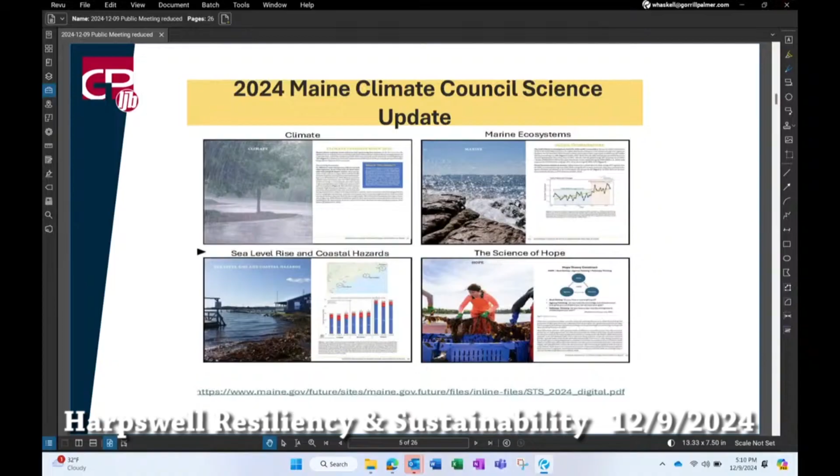A variety of different projects, from roadway projects to these resiliency projects more recently. We're also working on a couple of projects that are storm damage repairs from the last January storms. We're doing some work over at Little Islands Road, and also down at the end of Ocean Street, the trail to the giant stairs. There's some significant erosion there along the embankment that we're taking a look at. I think both of those projects have FEMA funding associated with them because of the damage and the disaster declaration from the January storms, but it all ties into these projects.

So we're working on this project for Bethel Point and Abner Point, and we also have another project for Lowell's Cove Road and Dingley Island. That will be coming next, with more meetings on that as well in the coming months.

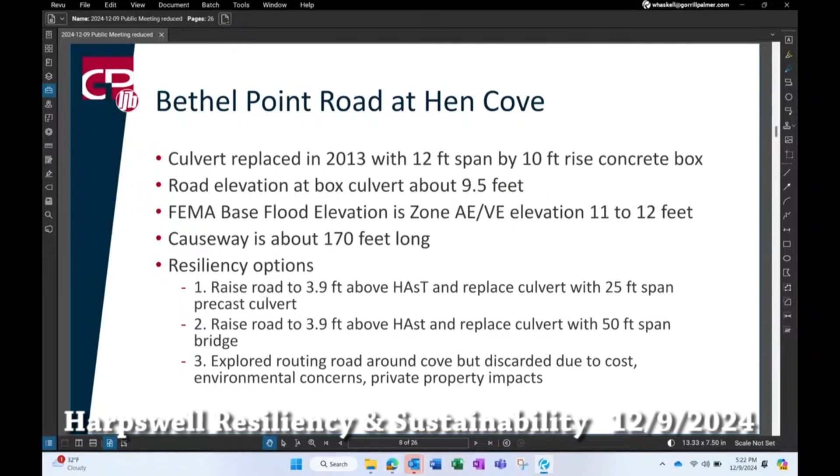So here's the current flood map. I just wanted to bring that up a little bit so you can see the road in here, but it essentially comes down and crosses over the cove here. Hen Cove Road comes off right here, Sage Road, which is a private road, is up here — just trying to orient you to everything. And Little Ponds Road is right here. So the ocean is down in this direction here.

So what we see on this map is this VE zone, elevation 12, which I mentioned, basically falls in between these white lines that I'm outlining with my cursor here. These maps are very interesting because on this side of the white line, it's elevation 11. So just a little bit of description of FEMA maps.

VE is a velocity zone, and it's where you'll see waves impacting the base flood elevation. As you move in closer and closer to shore, usually that elevation will drop down because you're getting more friction for the water as it comes in, and those waves aren't breaking as high. So what that shows is that over the bridge there, or over the culvert, the elevation of the base flood is elevation 12, which, as I said, the road is 9.5.

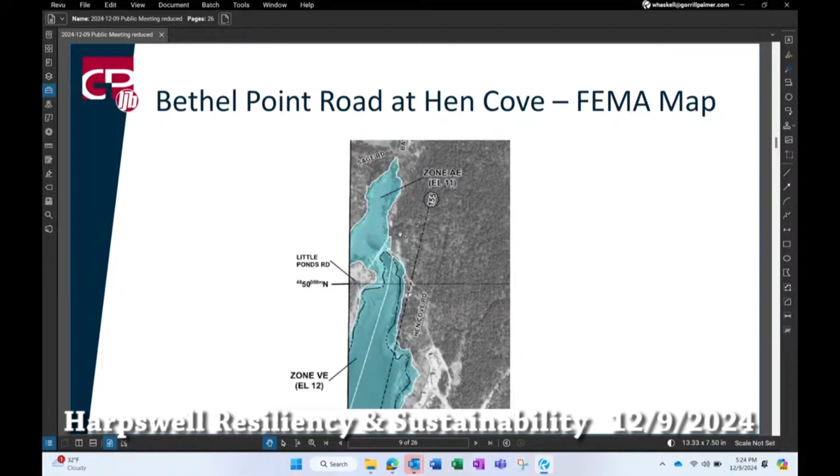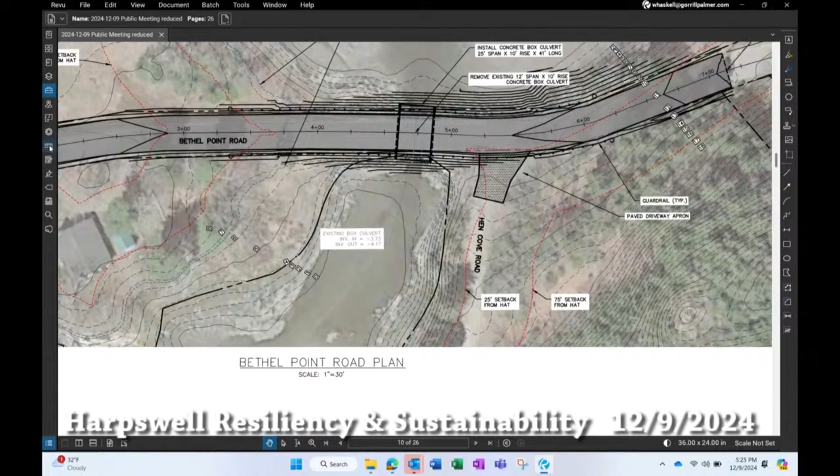Let's take a second to zoom in here. In terms of orientation of the map, the road basically comes in Hen Cove Road here. We cross over, the culvert's located here, and then this heads down towards the dead end of Bethel Point Road.

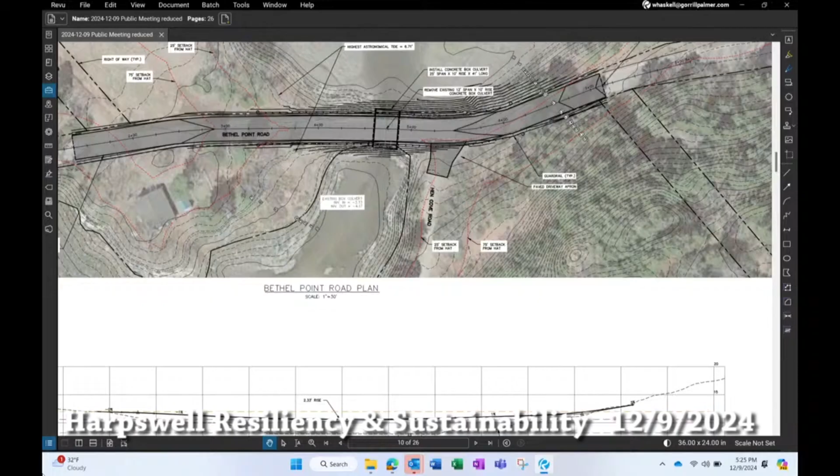What we're showing here is that we would need to reconstruct roughly 580 feet of roadway to raise this road up by about 4 feet. That isn't going to get us exactly to the FEMA flood elevation, it's still a little bit shy of that, but it would raise the road about 2.3 feet at the low spot, 2.33 feet higher than what it is today.

We can do an infinite number of options here in terms of raising this road. We picked 3.9 feet just because that's what Maine Won't Wait has kind of been focusing on as an elevation. We could pick it up to the FEMA flood elevation if that's what everybody wants, but it's just going to cost more money and result in more environmental impact, causing more permitting challenges with the regulatory agencies if we were to actually design and permit this project.

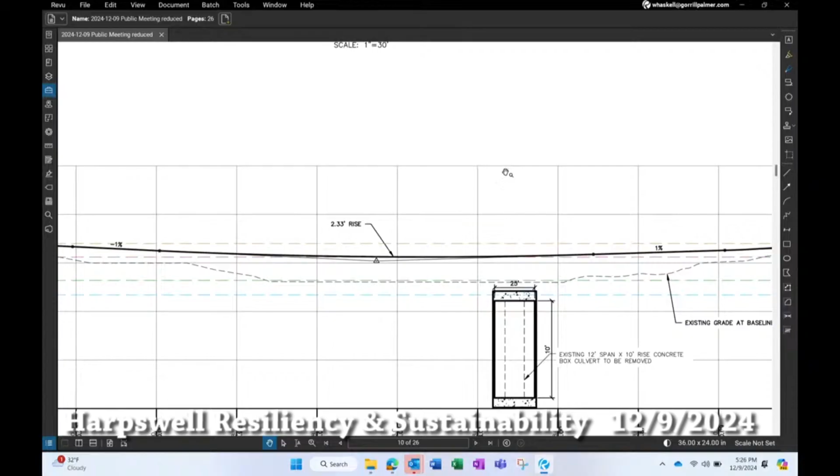One of the things we heard at the first public meeting, the kickoff meeting, from the gentleman who lives at this property, was concerns about whether the existing culvert is big enough to handle the flow. Well, it definitely isn't in terms of storm surge.

So there are a couple things you can do. One thing is you can build a bridge from one side to the other, spanning this whole thing. Cost-wise, that's probably not going to be a feasible option. So we looked at a couple interim options. One is putting in a 25-foot span, more than doubling the span of the existing culvert. Another option looked at a 50-foot bridge, basically spanning the pinch point, if you will, not from one side all the way to the other.

There would have to be more hydraulic modeling done to look at the impacts of those two different options, to see how much they're going to improve the hydraulics and the flow through there.

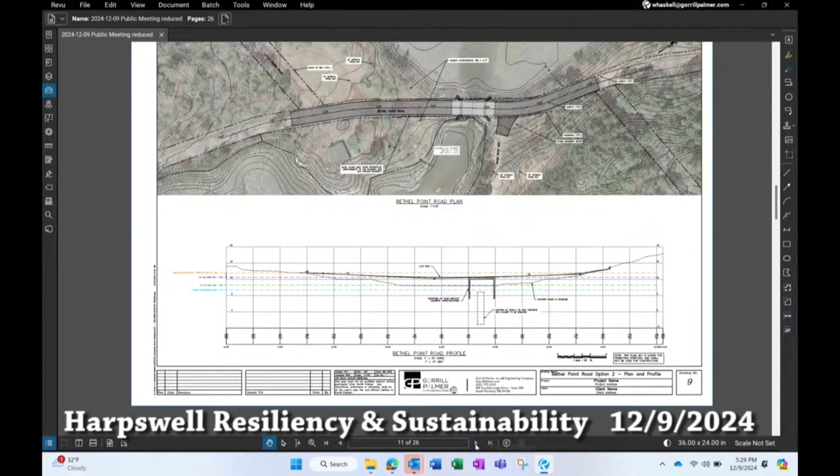Can you look at erosion on either side of the bridge? Because when the storms happened, it wasn't just overtopping the road, it was kind of eating away. Yeah, so part of our cost estimates add in erosion control, more riprap to protect the embankments on either side of the bridge. That's really important, having the correct, appropriate armor on either side to deal with that storm surge. Waves have more power, more force associated with them than just water that goes up and down without the surge. That's an important piece that goes into our calculations on the cost of these improvements.

So this option here is raising the road 3.9 feet with a 25-foot span culvert. You're basically looking at about $3 million for 580 feet of road. And then the bridge option brings you up to a little over 5.15, say $5.2 million if you want to round it up.

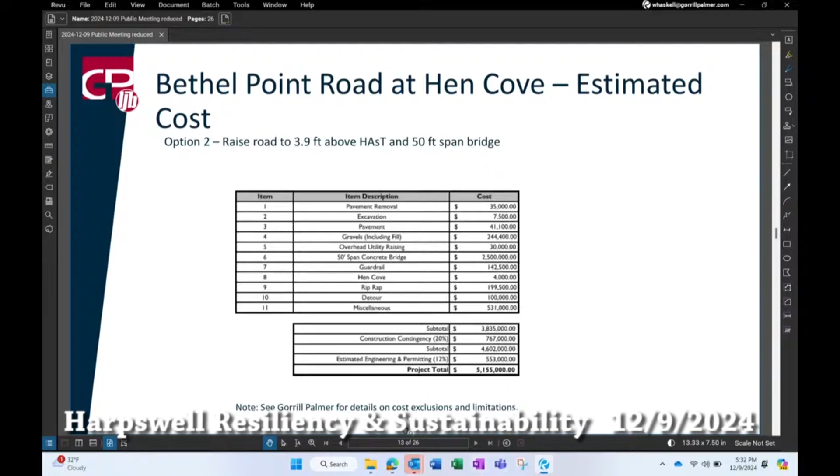What is the FEMA level again? The FEMA flood elevation here is 12. And we're getting up to, let me go back to my plan. We're basically getting up to 10.6-ish, so we're about 1.5 feet still below the FEMA flood elevation.

It depends on which side of the road you're looking at, though. On the other side, it's 11. So we're about 0.4 feet away from that one.

If I might just say something here, I think this is a high-level engineering analysis. But it does give the town an idea of when they're planning and when they're ready to move. We would then go out for an engineering design and build, which would give you more exact figures. But this is a planning tool that we're using, looking out the next 20 years or so to see where

we're going to have to concentrate our resources. And these numbers, again, are this year's numbers, too. It's not projected out, because we don't know how far out the town is, if the town is ever going to pull the trigger on a project like this.

It was really all about tying it to that Maine Won't Wait guidance. We could pick anything we want, it's just at some point you have to decide how many of these you're going to look at. We initially started looking at 1.5 feet, but that puts you right at the current road elevation, so we said we'll at least go to 3.9.

But we could easily do a cost estimate for going up to elevation 12 as well, and it won't take much effort to put together a cost estimate for that, which is the FEMA base flood elevation.

The interesting thing too is when we started this, the new flood maps weren't active yet, we were still looking at the old flood maps. Probably back in January when we met the first time, we may not have had that elevation 12 on here, because we were using the old elevation, which was quite a bit lower — it might have been elevation 9 or 10. So there's been a little bit of change over the course of the project.

Those were the floodplain maps that the town voted on in June 2024, and we're now using those. At Abner Point Road, if you didn't go with the revised map that the town had another consultant look at, the elevation in the original FEMA flood map was significantly higher — like elevation 21 or something — and you just can't raise the road high enough to get up to that elevation.

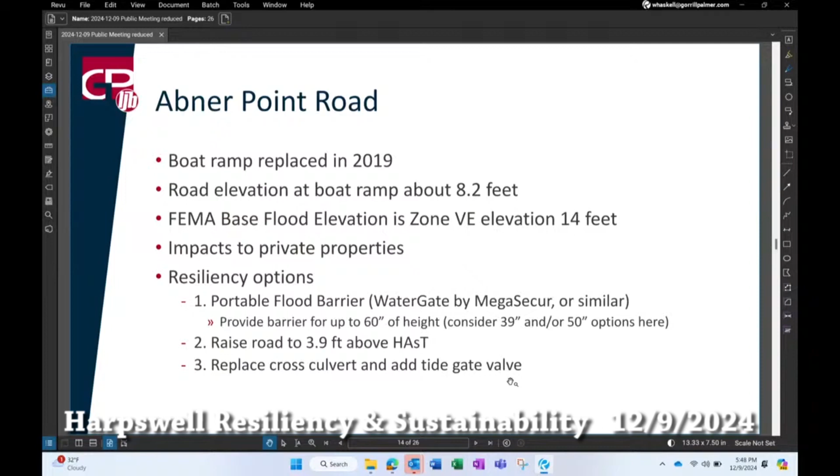We can put in what's called a tide gate valve. There's a couple different types of tide gate valves, I'll show you some pictures. Basically it's a check valve, and it keeps the water from backflowing through that culvert. It will at least give a little more time, or prevent that water from backflowing through there and flooding out the other side of the road for a little bit longer. It's a relatively simple solution that doesn't solve the problem by any means, but it may deal with some of the lower level events and keep that from flooding on the other side.

So we've got some information on all three of these, so I'll keep going here. Again, this is the flood map, just wanted to show that to everybody.

So here's Abner Point Road coming around the head of the cove. Again, a lot of different lines here. Out in this area, the VE zone elevation is 17. Over here, it's 21. In here, which basically impacts most of Abner Point Road, is VE elevation 14, a little bit higher than Bethel Point Road. And as you can see on the other side, it changes. This AO depth 3 seems a little bit odd to me, I have to look at that. But we have the VE zone over here that's 13 that comes up into that wetland. So you can kind of see that wetland does, as I said, a good job of dampening out those surges from the other side.

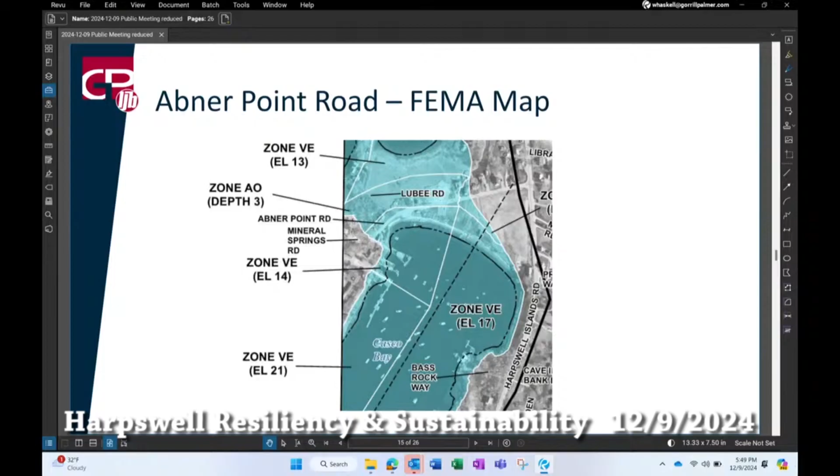So these are a couple tide gate options. I wanted to show you this product here, it's actually rubber, I call it a duckbill. It's called a tide flex valve. It gets attached onto the end of the pipe.

This curved piece at the end has a slit, so when water backs up and builds up on the upstream side, it basically forces the duckbill out straight, and the water flows out through the end. But it prevents water from coming back in this direction. So you'd put this on the Mackerel Cove side of the culvert, and it would prevent water from Mackerel Cove from backing up through that culvert to the Lubee Road side of the road.

How resilient are these mechanisms to debris? This actually works really well with debris. Debris really doesn't impact it too much. I guess if you had a huge mass of seaweed or something build up here, it might impact it a little bit, which I know there is a lot of seaweed that builds up over there.

There's a couple things we could do for that, that might increase the cost a little bit, to kind of prevent the debris buildup on it. This is what's called a flap gate, again attached to the culvert.

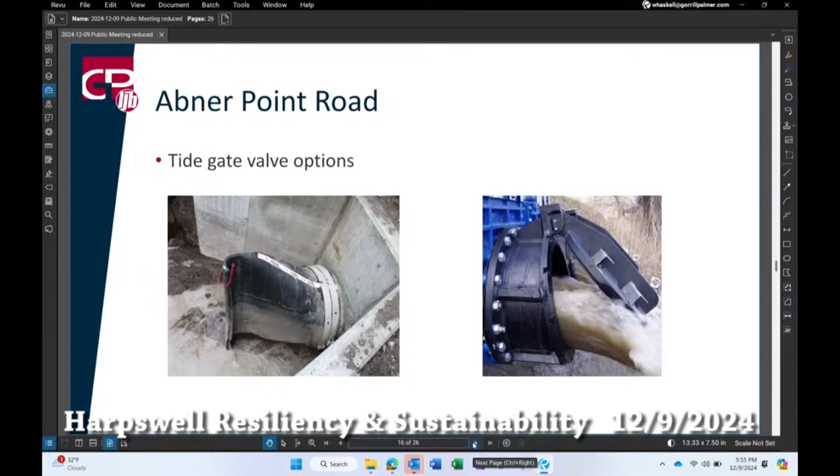So this is the few slides here. We actually met virtually with the folks from this Watergate product. This just kind of shows how these products are delivered and rolled up. It's pretty straightforward. They've been in business for a number of years, since 1998. They're based up in Quebec. There are several other companies that do similar types of products.

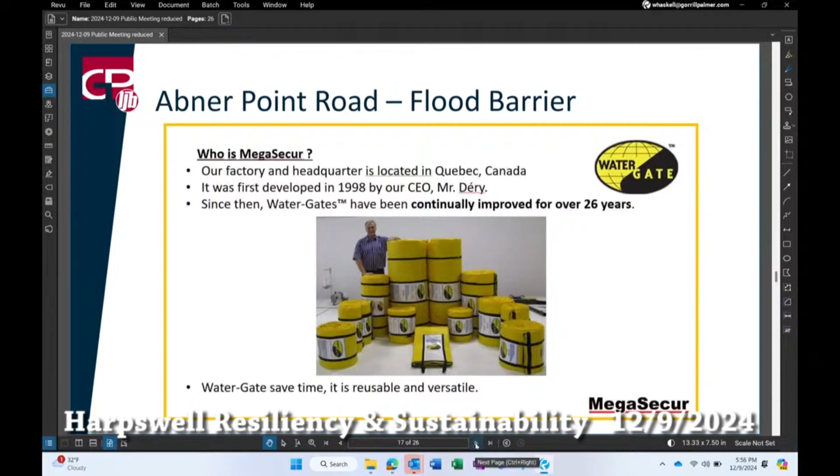This picture here shows how it comes rolled up like this. There's actually different types of crates and things. You can buy a specific trailer for these and just drive it down the road and roll it out the back when deploying it. You basically unroll it, unfold it, and it looks like this sitting on the ground, so the water would be coming in this direction. This is a weighted edge here.

It works pretty well over a wide variety of terrain. It doesn't necessarily have to be set on pavement. You just can't have a log or something underneath providing a gap for water to pass through. The water comes in, fills up these little scoops, and this section raises up, as you can see in this image. I've got a video later that I'll try to show you. The water comes in and automatically floats this up, and depending on which size you buy, it acts as the temporary dam in this case.

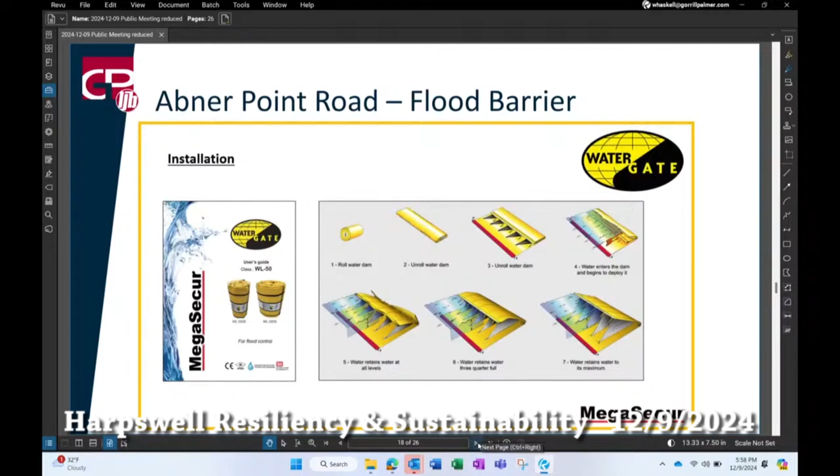This is a deployment crate, so you can buy it in these crates. We talked to the folks, and in this case we thought we'd need about 500 feet of this stuff. It would come in 3 crates, one with 200 feet and 2 with 150. It would be loaded into the back of a truck, and you basically pull this product out of the crate and lay it down on the road.

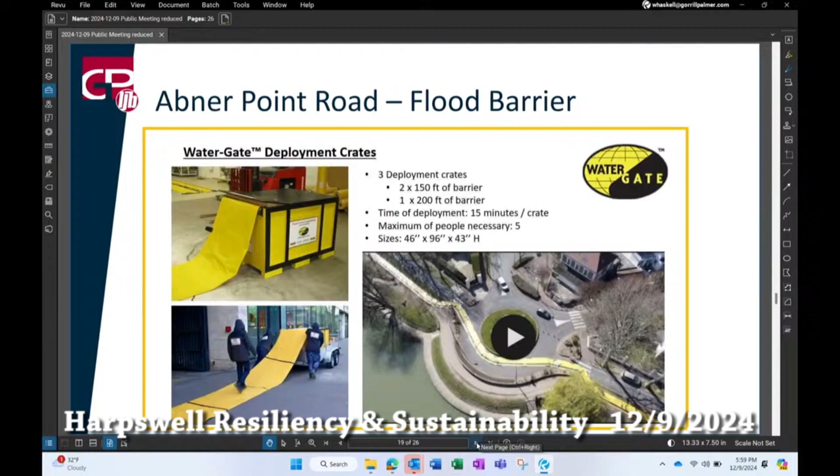Unfold it, and then let the water do the work when it starts coming in. You can see one of them here deployed, I think along a river, so it can have angles in it. It doesn't have to be in a perfectly straight line. They do them around houses and buildings. They're used in all kinds of situations to prevent flooding.

The other thing is, if for some reason it was deployed across a road, they have pictures of emergency vehicles driving over them when partially deployed. It doesn't really hurt them at all. They can drive up and over those things without doing any damage.

When the water goes back down, that's probably the most challenging piece, because you've got to let it dry out, then pack it back up and put it back in its crate. But hopefully it's not something you need to do every day. They say it can be deployed by as little as 2 people, though typically 5 people would deploy something like this. A deployment crate of 200 feet long would typically take about 15 minutes to deploy, so you could deploy all 3 crates within 45 minutes or so.

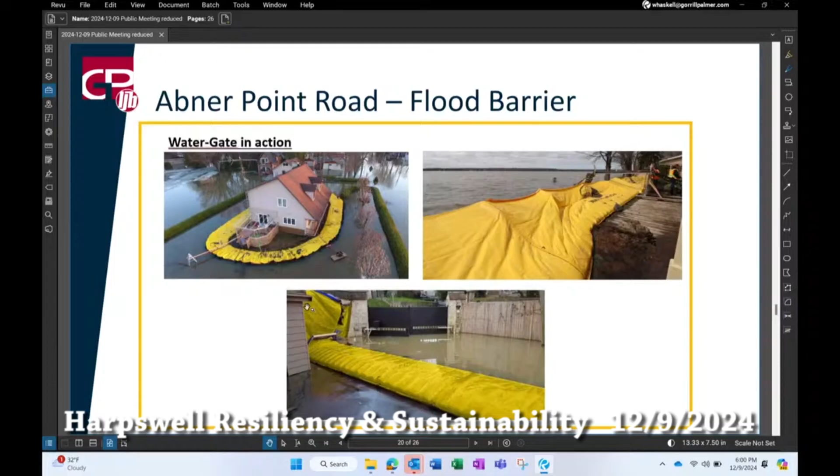So this is where I'm supposed to have a video. I'm going to wait till the end to show you the video because I can't activate it here in this PDF that I have. But I guess I could go try. Let me see if I can get to my video here.

How does it do in windy situations? It's pretty heavy duty fabric, so it's not an issue. And if there's water in it, I don't think the wind's going to impact it at all. And when it's flat before the water comes, it's really heavy.

Not really sure what they call that fabric, but let me see if I can get this going here.

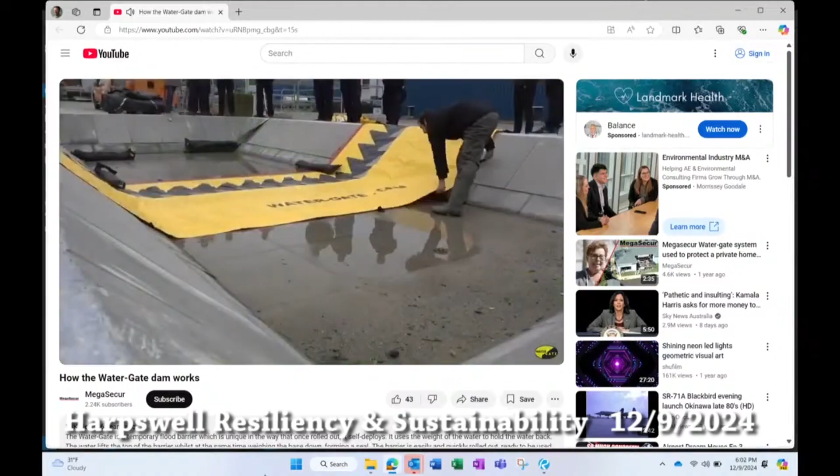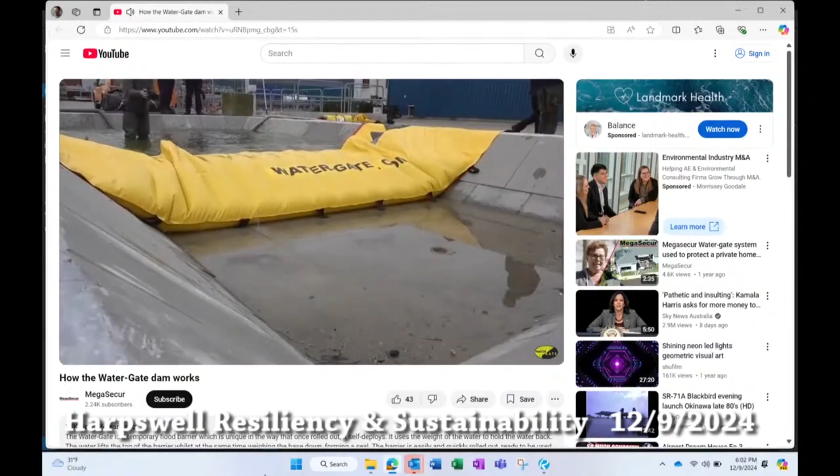By using this unique self-opening method, it reduces the time, effort, and number of people required to install it, making this a truly rapid flood or water diversion barrier. The WL Series water gate has a weighted front edge which holds the barrier in place and helps prevent water from leaking underneath. The barrier uses a type of stitching called lock stitch. A broken stitch will not compromise the remaining stitches. The barrier is easily and quickly rolled out, ready to be used. It is very versatile and can adapt to different environments. The water gate can be driven over thanks to its flexibility. It is highly portable and takes up barely any storage space. The barrier can be transported in a vehicle or truck to the designated site.

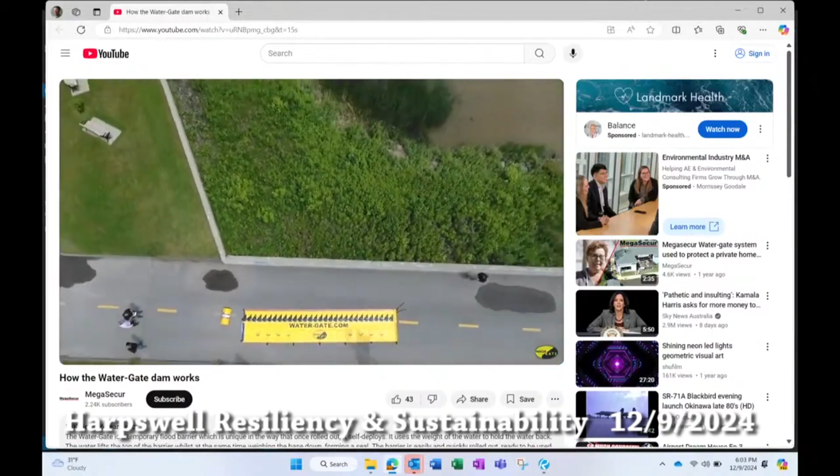What's the height of water that can absorb? Yeah, so you can get these up to 60 inch, 5 feet. At Abner Point, we were looking at 50 inch, just over 4 feet. Down in the low spot, kind of right in the vicinity of the boat ramp, about 100 feet of 50 inch, and then I guess 400 feet, 200 feet on either end of that of 39 inch, which is the next height down. So they come, I think there's one down below 39, then you got 39, 50, and 60. So those are kind of your options.

There are some other companies out there that we haven't looked at. We were just trying to present one option here. There are other types of these things too that are more, instead of fabric, plastic barriers that are L-shaped and kind of link together, and you build them similar to this. But I kind of like the automatic kind, as the water comes in it fills up and then goes back down, and just the ease of deploying it, rolling it out versus trying to fit these things together.

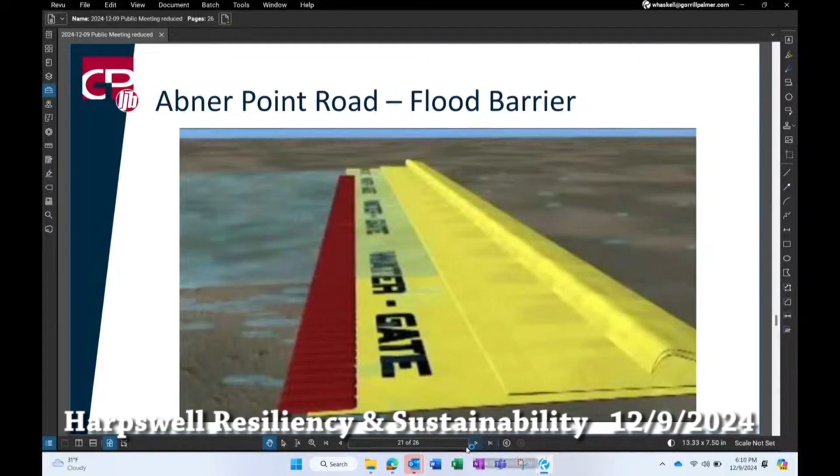What are the cost comparisons between purchasing something and deploying something like that versus raising the road? It's coming next. So, not quite next, but I'll get to it in a second.

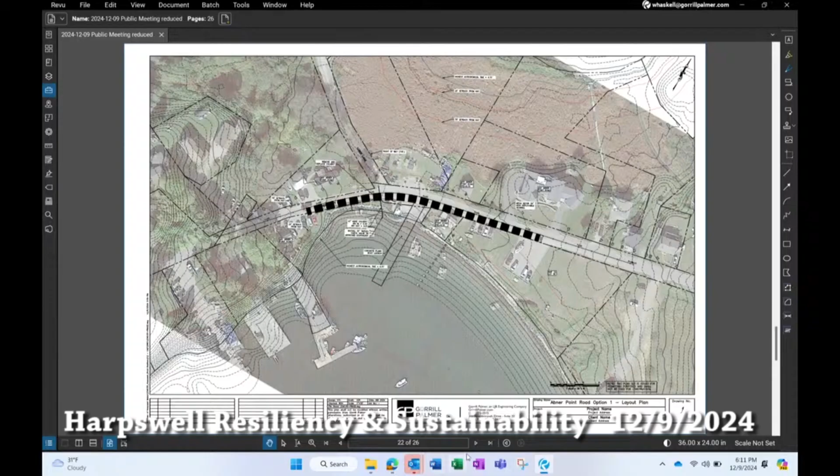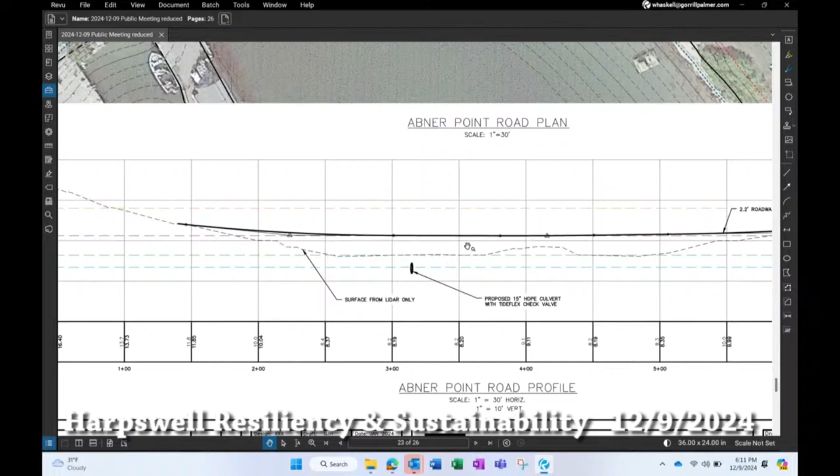So this is the raising the road option. Again, we're looking at 3.9 feet from highest astronomical tide, which roughly raises it about 2.2 feet in this case from the existing road. There's a little bit of a weird hump in the road here, and the FEMA flood elevation here is much higher than that.

In my opinion, well, I guess with enough money and everything else, you can do anything you want. I think it would be very difficult to raise the road to the FEMA flood elevation in this location. Less difficult over at Bethel Point Road because you have less impacts to private property and things like that on either side. If you asked me, what's the cost to raise the road to elevation 14 at Abner Point Road?

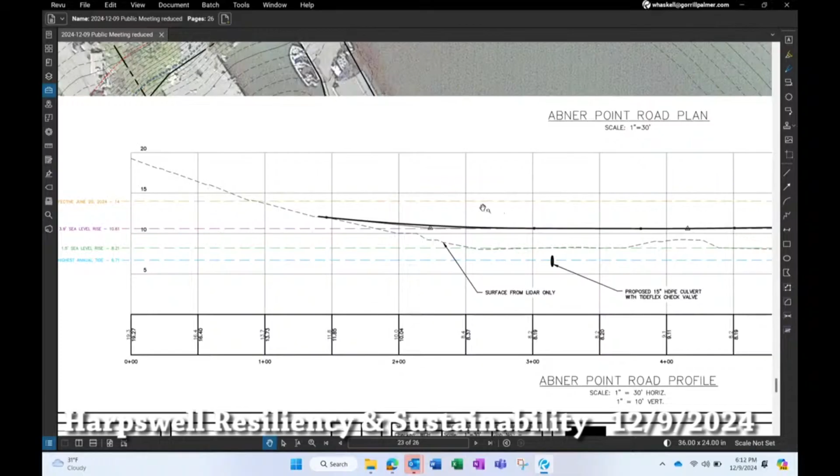I can come up with a cost, I guess, but it's just so challenging with some of this existing private property - these two structures here, this house here. I think the boat ramp becomes much more of a challenge.

Raising the road roughly 2.5 to 2.3 feet above what it is today actually may help the boat ramp out a little bit - it improves the slope of the boat ramp better than what it is today. But if you raise this up to elevation 14, I think you're going to make that boat ramp a lot more difficult to access. Potentially, if you rebuilt the entire thing, yeah, maybe we'd be able to get something to work there.

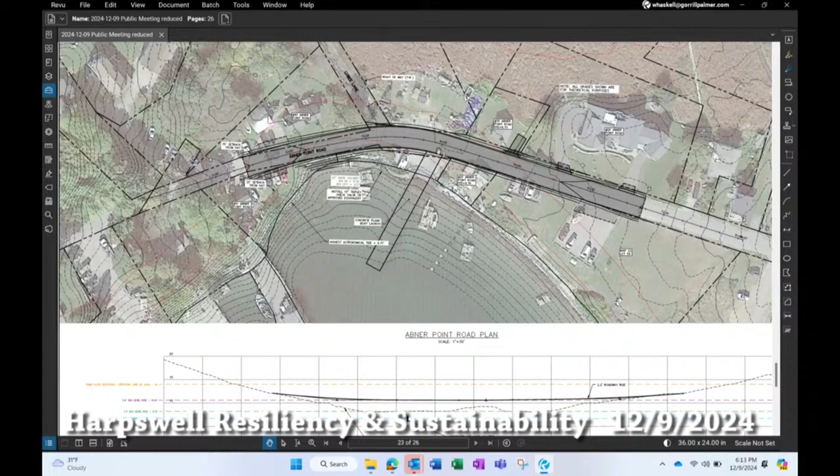So there are a lot of challenges with raising the road to the FEMA flood elevation in this location. Let me see here. Come on, there we go.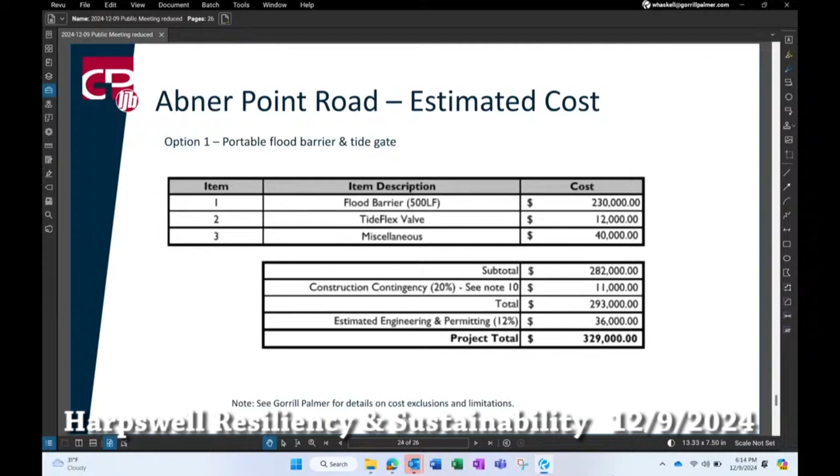So 329 versus 1.5 million. This is a little bit lower than the other ones on Bethel Point because we're not replacing a massive culvert like we were over there. That culvert adds a huge amount of cost to that project.

So still not insignificant, but it's... And then the other thing that this doesn't deal with is the ancillary costs of the private properties that are affected by you raising this road up.

We're reconnecting driveways where there are existing driveways, but we're not raising structures and all of that. So there's a lot of other costs that would likely occur, and the town would need to decide how they want to deal with that. If it's being caused by a town project, I don't know all the answers in terms of the private property owners, you know, because now all of a sudden your road's 2-3 feet higher than the structures on either side.

I know there's been discussion, I've met with one of the property owners to talk about their properties and the two structures next to the boat ramp. I know they would like to raise their entire lots and raise the houses that way. Based on my knowledge and experience with permitting and regulatory agencies, I don't think that's feasible. I think if they want to raise their structures, they're going to have to raise them up on piers. So you wouldn't be raising the elevation of the lot, the ground of the lot. You would just be raising the structure up in the air.

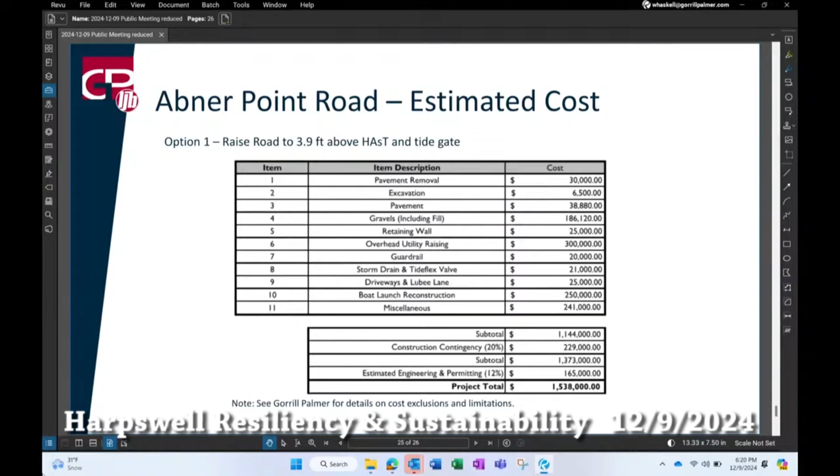Based on the recent past with weather, if you were to go with the portable flood barrier and the tide gate valve option, how many times a year would that likely have been used? More each year, potentially. I mean, using the most recent data, I'd say 2 to 3 times maybe this past year.

And the life of those systems, you're saying, is 20+ years? Yeah, I mean, as long as they're treated well and you're not just throwing it over onto the side of the road till the next one and then pulling it back. If you pack it up, dry it out, and pack it into its crate, then deploy it again the next time, I think you would probably get 20 years plus out of that type of system.

There'd have to be some operating costs, you can't just have this thing appear. There's probably some training involved too. They make it sound like it's easy to deploy, but you've got to have the people there to deploy it when it needs to be deployed. It's not like we have a full public works crew here in town, though some towns have a public works crew that could potentially be responsible for that. There would have to be consideration of that for sure.